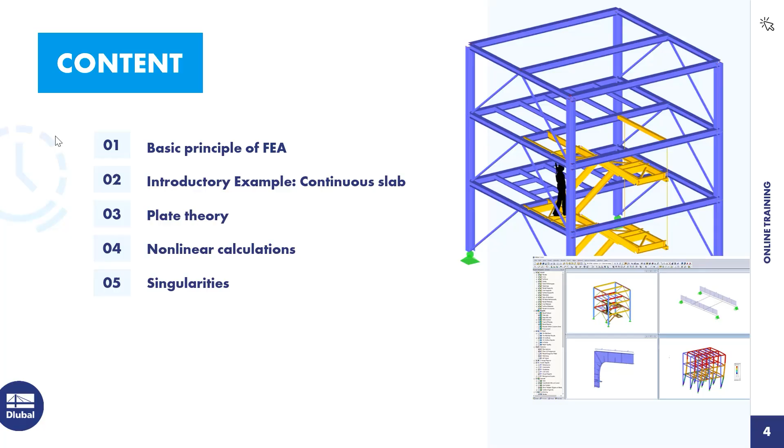Okay, so let's start with our basics of the finite element analysis. As you may know from previous statics lessons in your studies, there are two methods to calculate overdetermined systems: one is the displacement method, and the other is the force method. The force method is called that since the forces are the unknowns in this solving process. Within the displacement method, we have the displacements as the unknowns. The displacement method is more important for us since it is implemented within RFEM, and most computer programs will use the displacement method.

In general, the finite element analysis is used when an analytical solution of the structure is hardly possible. That means we can't just create a function for, let's say, an 8-story building, which gives us the exact solution for every force we have there.

Instead, we will take the help of finite elements, and that's what we do with the finite element analysis. We take the real structure and we cut it down, or decompose it, into a mesh of finite interconnected elements—a specified amount of elements in the system that are connected to each other. We'll see it in the next slide as well, there's some graphics for better understanding. Then what we also need is to define the properties of the element continuum.

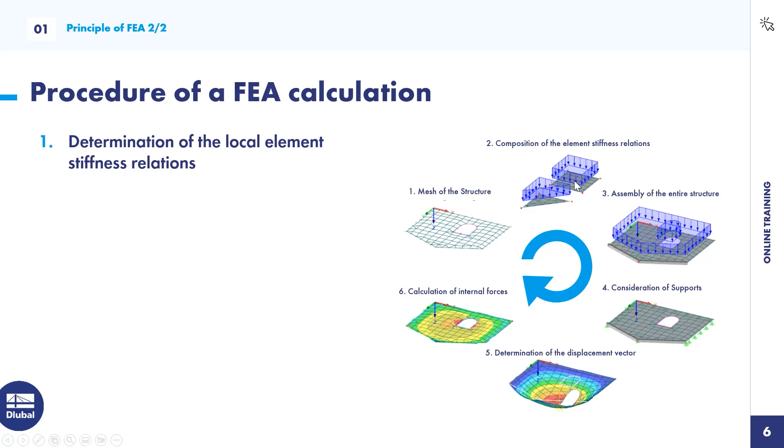For these finite elements, we can define the stiffness matrix, the element stiffness matrix, as well as the element load vector. So we have the system, if we only inspect one finite element, already known. In the next step, we will combine all of those elements, and therefore combine the element stiffness matrices and the element load vectors into the global stiffness matrix as well as the global load vector.

Now for the understanding, there's this static equation called K times U equals F, which means the stiffness matrix times the deformation vector is the force vector. Due to assembling them into the global matrix and vector, we have this K as well as this F. But what's not known is U, the displacement vector. And that's what we want to get to.

So let's go. Now we have the total stiffness matrix K. In the next step, we will use our support conditions, we can see it there, and use it within the displacement vector.

For example, for this edge of the slab, we have a line support, and this line support is fixed in Z direction, which means the line can't move in Z direction. That means each entry within this displacement vector which includes the location of this line hinge must be 0. So we will build this into our equation system.

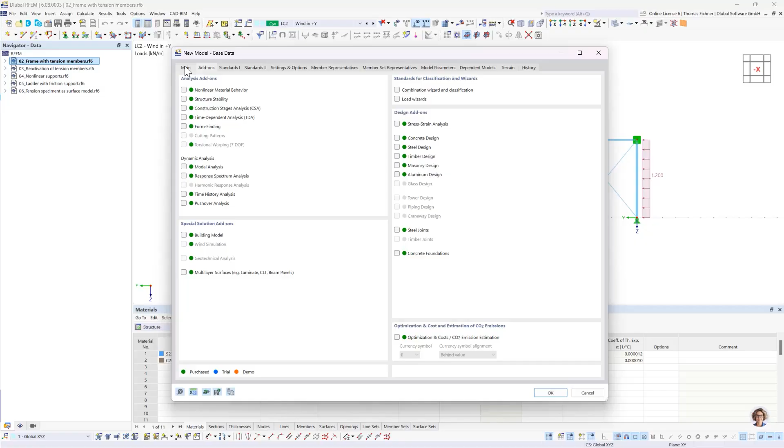Okay, and that's it, so we can press OK and find our empty model in the next step. There it is. So let's go with the view into the Z direction. We can go with our view cube or with those buttons here on top. That's pretty great, and there we are.

So since we're gonna model together, let's say to start from scratch, I will also delete all of my previous elements here. It means you just delete all basic objects, so there's no material defined anymore, no section, and no thickness.

Now let's go with creating our first surface. Therefore, we could go here and just double click like the surfaces, or right click and create new surface. What's also possible, and I mainly use this button since it's just the fast bar here on top, I will click on this button and then we can choose the rectangle. If we used it the last time we created a surface, we will just click it and have the dialog opened.

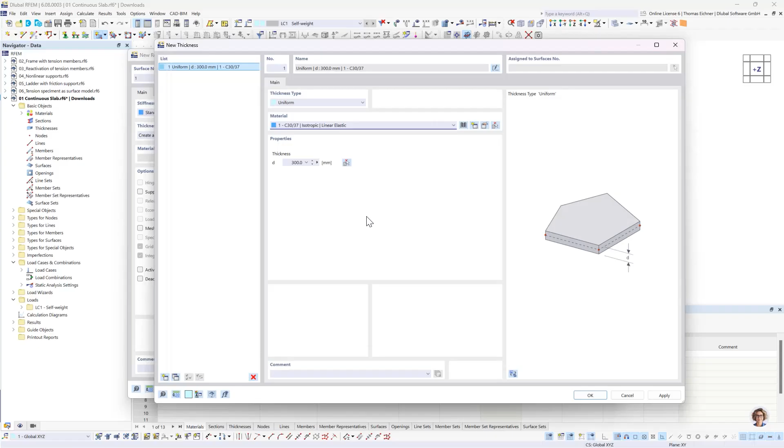So we're gonna take this one, press OK, and there it is. With another press on OK, we will have our material assigned, and then with another press on OK, we will have our thickness as well as the material assigned to this surface creation. And that's what we're gonna do next—we're gonna press OK to get back to our graphic interface.

There we are. And then we will create a 10 times 5 meter surface. Yeah, why not like this? And there it is—so we have our slab right here.

We can also look at it in 3D. We can use our display model settings for showing them, let's say, transparent or filled. This view is always good for, let's say, bigger structures when there are more surfaces under each other or they're overlapping kind of and stuff, so we can pick them better with this dotted or lined line here.

Per double click on it, we can adjust it, but that's not needed right now. Also, we can see our base elements, so our material, our thickness, as well as our surface right here in the data navigator.

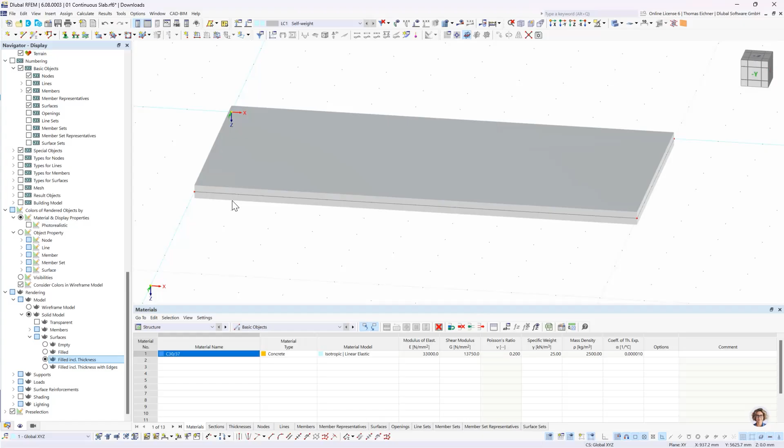In addition, there's this button here where we can influence our rendering. If we go to the rendering on this model, we see the solid model options, and further in the surfaces, we could also show them with thickness. That's just if you want to have more of an architectural view, and you could activate this.

However, since it's a static program and we will use it for statics, this kind of 3D element - because like a real plate has a height as well, but in our finite element analysis, we will treat this as a 2D element. So it will have just 2 dimensions.

Okay, let's leave this here, that's not needed anymore. So what we did now is we just created one plate. And this plate would just fall down right now. So what we need next would be our boundary conditions.

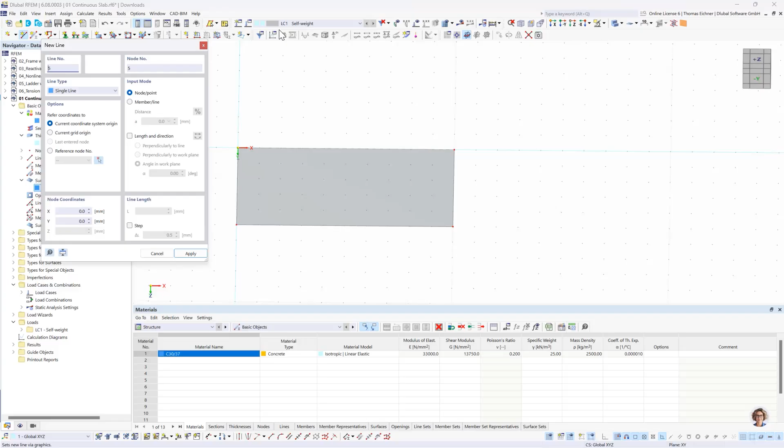And for those boundary conditions, we will also need a line in the middle of the surface. So that's what we're going to do. We're going to take this create line function, and go in the middle on the top as well as in the middle of the bottom. There it is, our lines are set. We can also show it in our other display mode so we can see the line better.

Now we want to apply our support conditions to those lines. That's completely simple - we're just going to take our quick button here on top. Or we could also go for our types of lines, for line support, and then assign them. However, since this is the most used tool here on top and it's quite fast, we're going to go for this procedure. Let's take it, and let's also look at this suggested hinged line support.

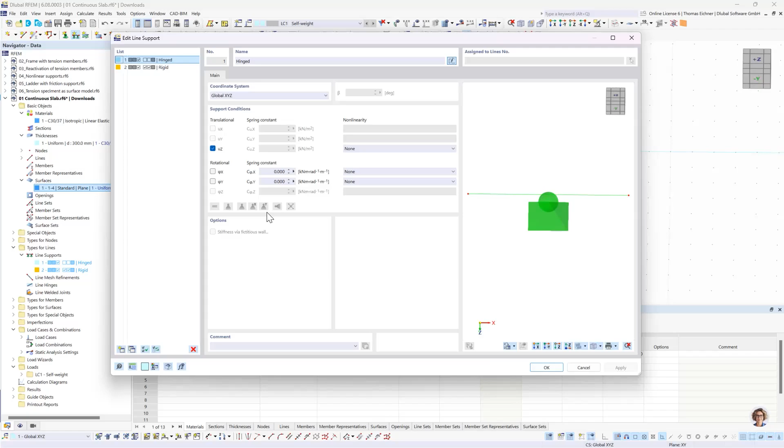And now we will see the benefit of our early decision to model it in the plate dimension and not in the 3D domain. That's quite simple - the program now helps us since we are in 2D plate, we don't need the deformations in the horizontal directions anymore, and we don't need the rotation about the z-axis, which also would be kind of deformation in horizontal direction. So with this, we only really want to hold the z direction on these lines, and that's already set within this preset hinge.

Let's go for it, here again, and then we will apply those supports to our lines.

There they are. We can also apply the loading next, which will be just a uniform load, a uniform surface load of 10 kilonewton per square meter. And with that done, we can just assign it to our surface here. Okay, and there it is.

So our loading is done, our supports are done, our system is already ready for calculation. Just another hint - we can also adjust the size of supports as well as of the loading if we want to have it changed.

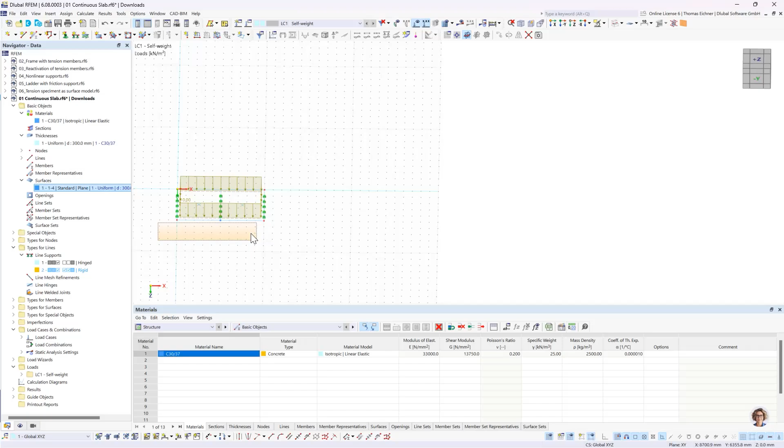Then maybe let's just create our further plates for the investigation. Maybe you saw it already on the PowerPoint file - we will need 4 plates to investigate, which means we will go again and select everything within our current system.

We will then right-click it and take the benefit of our move and copy function. Let's click here, and let's also check this create copy button, which is really important. The next step, we're going to copy it 3 times. We have a length of 10 meters, then I want to have a space of 5 meters, and then there should be the next system. So we will need 15 meters.

Now I just see from a previous model I had open, I'm still stuck with millimeters here, the dimension of millimeters. I want to work with meters in the current model, so we can go for these units here on the bottom. We can click on it, and then this red arrow will help us see what units are used in the current dialog. And we see we have here lengths in millimeters, and we're going to just change it to meters.

Gonna prove it here and set our displacement for the X direction to 15 meters. When it's done, we can confirm it, and there our new models are.

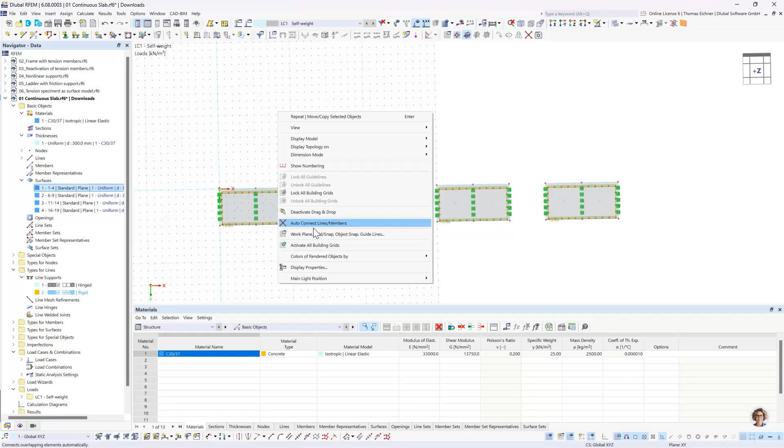Now what we see is that our grid is not over the whole system anymore. So we want to adjust also our grid here, and that can be done with a right click just anywhere on the screen, then click on the work plane and grid options.

Within here now, we can say okay, we have right now 30 dots from here. That's not enough. What we want to have now is, I'm just gonna put a lot of points here. Let's pick 200. Later on I will show you also this dynamically number of grid points.

But we will also want a different spacing between those dots. Currently they are set to 1 meter. The problem with this 1 meter now would be that we won't have dots in the middle of the plate, right? Since it is 5 meters, the middle would be at 2.5 meters. That means I will adjust it and make our grid a bit more fine. Let's set it to 0.5 meter and apply it. There it is. Now we have our grid.

Yeah, and it's quite better. Okay, so we have that.

We can also look at our plates in 3D for a second. Let's go like this. Looks okay for this short duration of time. We just created 4 cool systems.

At least simple systems. Okay, so in the next step, we will go for the Z view again, and as I previously mentioned, we want to investigate the size of those finite elements. Another hint: if you double click your middle mouse button from anywhere here, you will get back to the system and the screen is just adjusted to have all of your system within this window.

Since we want to investigate the size of the finite element mesh, we will also want to have those slabs with different finite elements. But at first, what is used if we don't define it for each surface? Without any assignment, we will have just our base settings here.

This means we can look at them with this calculate button on top, and here we can find our mesh options and everything regarding the mesh. If we go for mesh settings right now, we will see that currently we have a length of the finite elements of 0.5 meters, which means these edges of those finite elements, the program tries to reach 0.5 meters with them. If it's not possible, then he will vary it and could also add triangular elements.

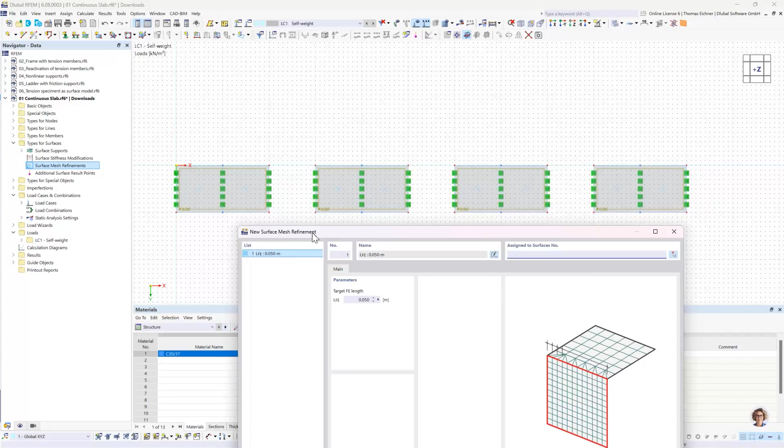Right here, we can now just create our surface refinements. The first one will be quite coarse. We will go for 2 meters and assign it to our first surface here. We will apply it and create our next mesh refinement here.

This will be only half the size—well, the edges will be only half the size—and we will apply it to surface number 2. Maybe you can see already, we created surface number 1, then surface number 2. So we can be smart and think about this as surface number 3 and this as surface number 4.

Okay, so for the first two, we clicked this and selected it in the graphics. For the next two, we will go with our faster way: we'll just enter surface 3 right here. Then we will go for the fourth one, and this one will be quite fine, and it will be assigned to our surface number 4. We will also see on which surface each mesh refinement is applied to, here in the brackets.

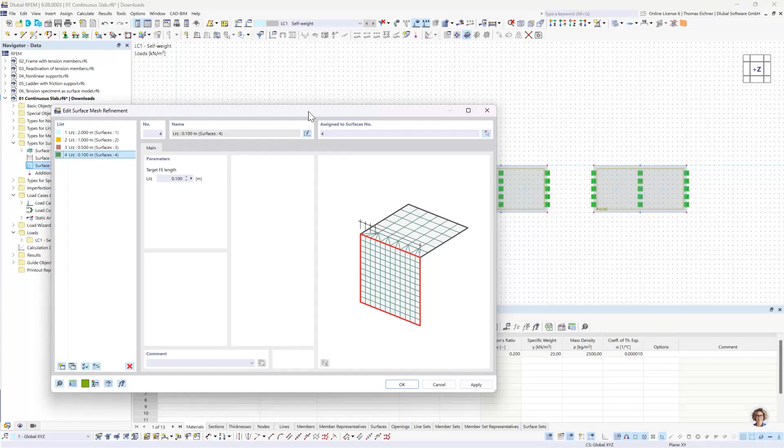Before I press OK, I just want to have this here, so you will see what happens right here. Let's press OK. And there it is. We now have a new rectangle within our surface.

And those rectangles, we can see it also for every surface, maybe like this. Shows us what the desired length, or desired size, of these finite elements will be. Here our quite coarse 2 meters length, and here, well, we would have to zoom in to even see how big this element is. So that's really fine.

Okay, so now we have the system created. Now we can go on and create a little helper for our interpretation of the results. Since surface results are not the best to interpret within the surface overall, we could also create a section through all of those continuous slabs, and then we can evaluate the results just within this section. That's what we're gonna do.

Now the section is not a property of any basic object, it's not only like the section can cut a solid as well as it could cut a surface, so it's not a property of a surface, for example. And for that case, we have something called special objects.

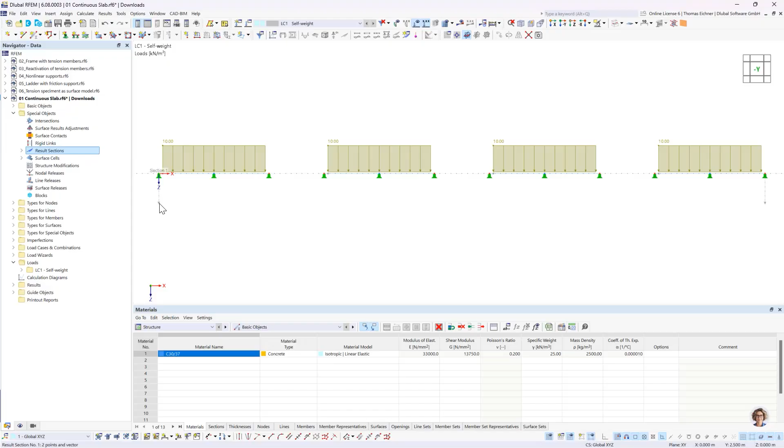Let's press OK, and let's turn the model for a second. And here we see it. Oh, maybe it's better to just use this -Y. And there we see the section right here. Okay.

So our surfaces are ready to go. Let's maybe show our refinement of those surfaces again. And for the comparison, we said we also want to look into the results of a just simple constructed beam.

That's what we're going to do next. We're going to create here this new member. And within this member, we will have to apply a section since we don't have any. It's like the same procedure as with the thickness before.

Let's go for it. Gladly, our right material is already selected here. And we will have to adjust just the section dimensions. So, what do we take here? For the height, it's quite obvious, we will take the same height as for the slabs.

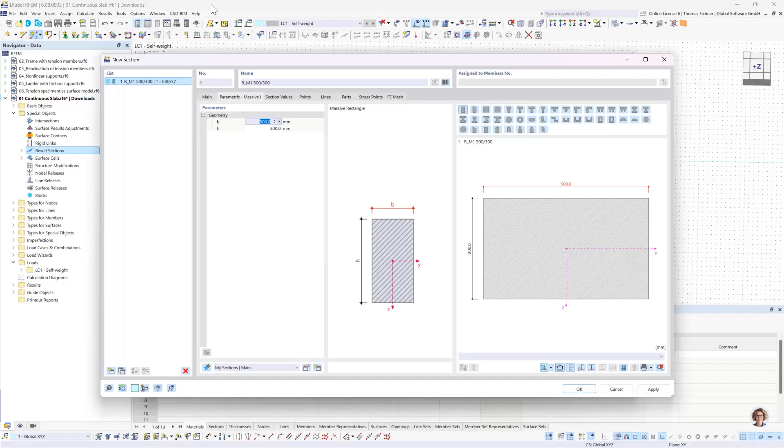But now let's look at the other dimension of this section. We have 5 meters in the width of the plate. However, we now don't need a 5 meter section here. What we do need is a 1 meter, so 1000 millimeter section right here.

And the reason for this is the results of surfaces are displayed per meter. And the results of members and beams are just shown in pure kilonewton. It's not kilonewton per meter, it's just kilonewton. So if we would have 2 meters here, it would still be just kilonewton.

So to have this per meter within the results of this member, we will just pick a 1 meter section here. Press OK here and also press OK here. Will get us back to the graphic user interface, and we will be able to create our 10 meter long member.

This is done now. Now I see I have here some member representatives. They wouldn't be needed. Let's see if we can just deactivate them. I mean, it doesn't change anything, it's just some help, but I don't want to have this dot right here.

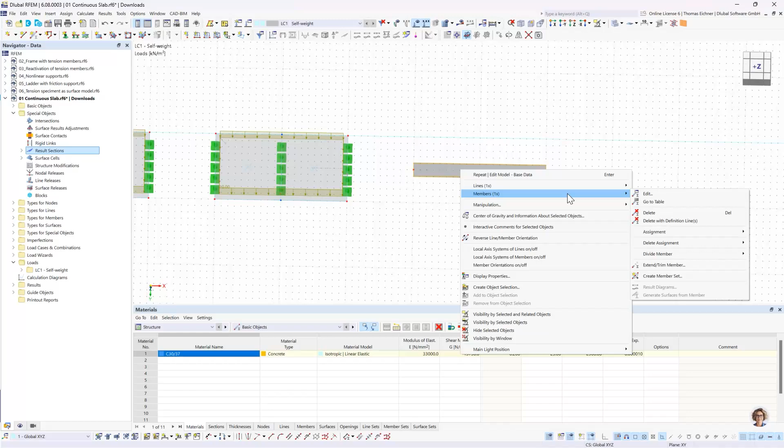Okay, now we want to have supports again, but we are missing this one node in the middle. So what we're gonna do is right click on the member, go for this member, and divide it with n intermediate nodes.

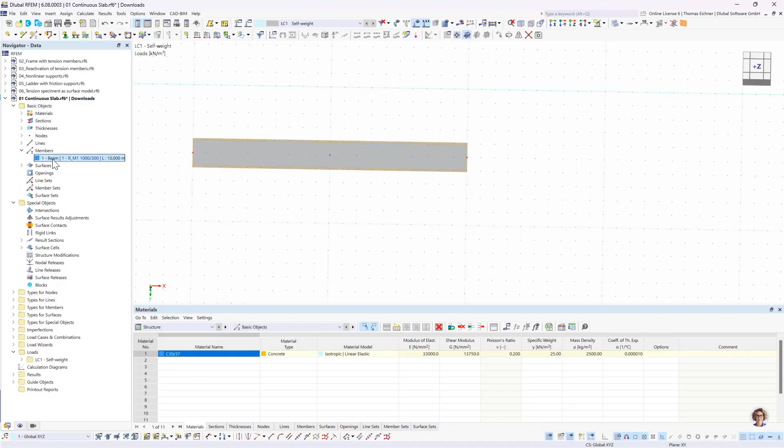There, just one is enough, and we can create the division. If we press OK, this member would be split into 2 members still connected in the middle, but we can also use our member nodes so this member won't be divided. As a hint, it wouldn't make any difference for the results. The only difference is we still have 1 member, and if we go for the basic objects, here still only 1 member, and you can have fewer objects within your model with this.

If we hover over this node, we can see that it's defined with 50% of this member length, which also means if we now change this member in length, the place of this middle node will change. So we don't need it.

So let's go back to this 10 meter beam and now apply our support conditions. For this plate, we only fixed the Z direction. Now for the member, if we think about it, if we only fixed the Z direction of this member, that seems okay in the first step. But the problem is it could rotate around its own axis. This is not possible with this line support for the surface, since it's supported here and here, so no rotation is possible.

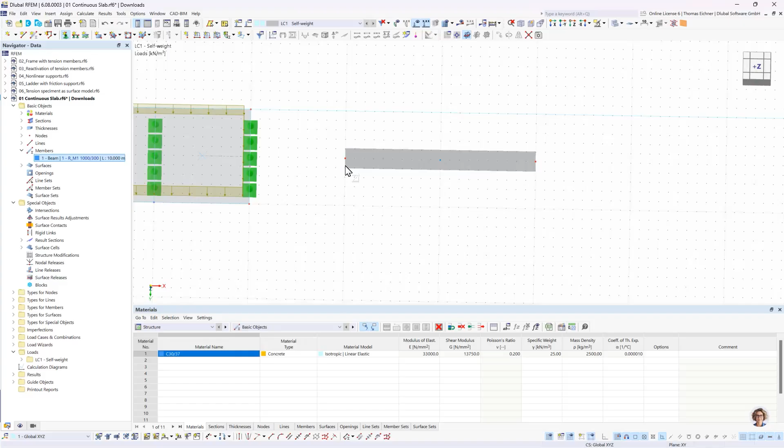But with this point nodal support, we don't have this interaction. So we need to also restrain this rotational degree of freedom. We will go for this nodal support, and we will look at our predefined hinged one, and there it is. And now there's the point I just said - we will also have to restrain the rotational degree of freedom here. We would only need to restrain the rotational degree of freedom on one node, and we wouldn't need it on the other two, but for simplicity I will just apply it to all three nodes, since for the results it doesn't really matter in this case.

Okay, so there's one more thing, and that's that we need to load the member in the same way as we loaded the surfaces. That means we will take our member load here on top, and just apply 10 kilonewton per meter to our member. When it's done, we have it right here.

Okay, now our system is completed, but I just remembered I also want to have something different in the material. So now we want to change the material. There are different ways to go about it. We could double click into our surface and go for the material and so on, but that would need a few more clicks. The simpler way would go like this: we will take the material here, double click it, and we are in all the properties of the material.

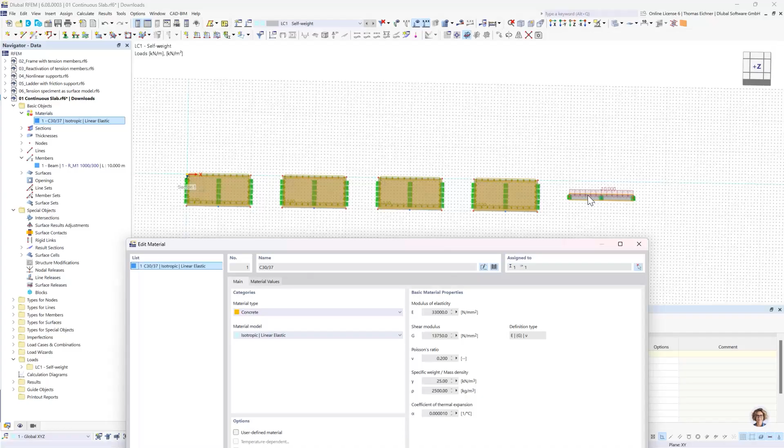And now what I want to change is this Poisson's ratio. That's a value that describes the influence of an internal force that makes pressure in one direction - this Poisson's ratio gives you information about how this internal action in this direction would influence the perpendicular direction. Since we are comparing everything here with each other, we don't really want to have this impact. So we want to set this to 0, and that's only possible if we first activate this small user-defined material button. With this active, we can just change it to 0, and then we are good to go.

Let's see our self-weight load case here on top. Within this, we only have this one - we have our 10 kilonewton per square meter load in it. But here's also, that's just predefined by the program - it always creates a first load case with only the self-weight active. For this special case, we don't need it. It's simpler to just have a 10 kilonewton per square meter load for interpretation. So we will just deselect this option.

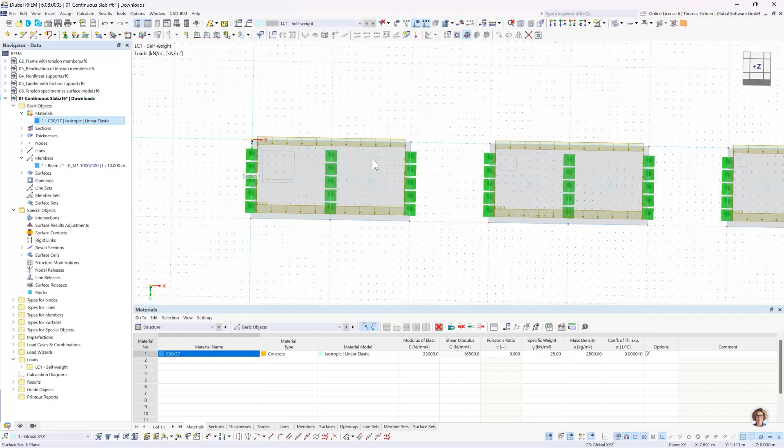Okay, and yeah, right now we're done. So maybe to repeat a bit of theory from earlier: we have our plate, which defines our stiffness matrix. We have our loading, which defines our load vector. We have our supports, which have influence on our deformation vector. And with that, we have our equation, K times U is equal to F, ready for its solving process. And that's what we're gonna do now - we're gonna go here and calculate this equation. Let's see what's gonna happen.

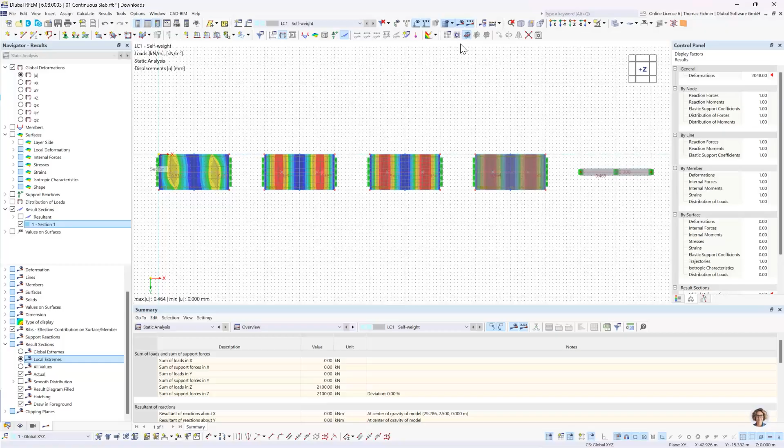Okay, let's see why those results are like this right here. And therefore, we will go for the Z view again. And also we will not show the results for this investigation. Now we see our constructed mesh, and we see this completely fine mesh. We will ignore it and just look at the difference between those three models.

So in the first model with our 2 meters length here, well, that's quite coarse. And we also see we even have here a triangular element, which is also always not perfect, since it's better to have a uniformly distributed rectangular finite element mesh. Sometimes it's not possible to avoid those triangular shapes, but if possible, you should try to avoid them. So right here we have 3 elements.

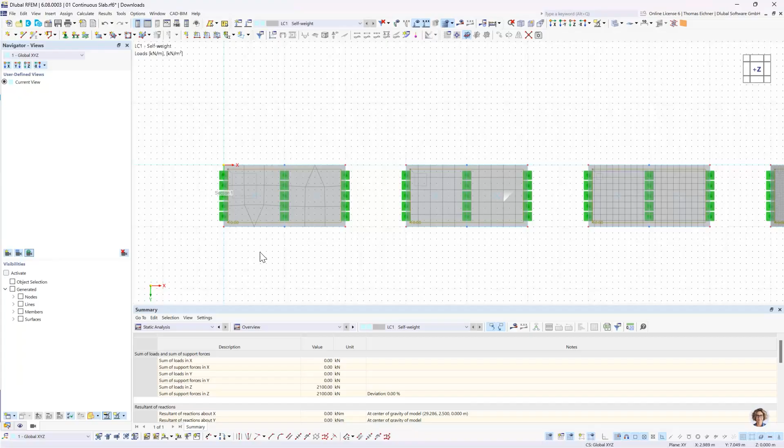Now when we look at it, we could also imagine a single span beam here. Then we know our maximum moment would be in the middle. But with this element in the middle, we wouldn't have any result in the middle. That means we wouldn't even have the possibility to show the maximum here, because the next value which would be shown would be this here at the edge of this element. So that's just not good.

And that's the point here in the next figure. We can see 5 elements here. I learned some rules in my studies, and the rules were like 6 elements between supports for a single span beam should be good. You should use 6 elements between 2 supports, or also if you have a line load or a support load, you should also have 6 elements between this line load and the next support or line load.

Like everything, there's a change in the boundary conditions or the force, there should be around about 6 elements to the next change. For design, if you're just interested in looking at the forces that will get to your supports, then it could also be that just 4 elements are enough. But if you want to remember something for the future, I would go for 6 elements.

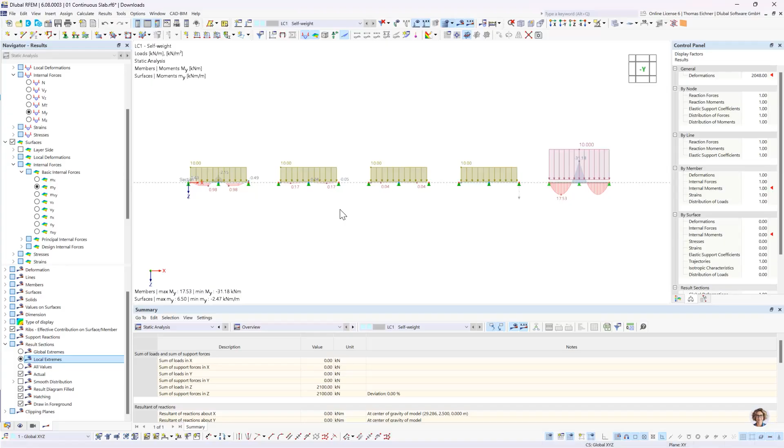Now for the explanation, we have different internal forces conventions here. So for the MY, it's quite simple. Our y-axis points outwards. This means with the right hand rule, we will know our positive MY would be like this, pointing upwards. It's rotating around the y-axis. That's why it's called MY for beams.

But now it's different for the surfaces. Before I'm gonna explain it, we will change to the right one. We will go for this MX. Now we see, okay, now we have comparable results.

But why is that? Now for surfaces, this is differently defined. So it's called MX since we have the surface. We will go in X direction, and there's like a plane that's cutting through the surface now. And it's cutting in X direction, so perpendicular to the X direction. And then we rotate about this edge here, this free cut edge. And that's why, since the cut was done in the X direction, it's called MX. That means the MY would be exactly in the other direction.

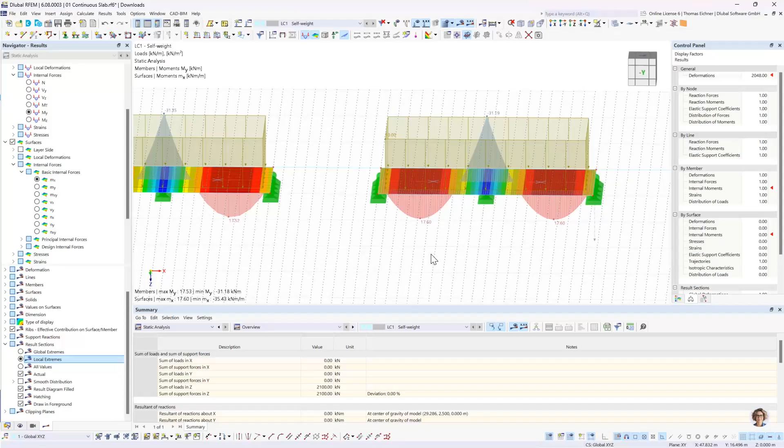So let's go again for the Y perspective. We can also see here the results are quite similar. And let's not show the forces anymore. 31.18, 31.19. That's almost the same, but there will be some differences.

And for this time, we will go for this section here. Now we select this section with a right click, and then this result diagrams. We will jump right here. There it is. And here we can just see the results for the different cases. It's just the same as we saw in the model, just that they will be next to each other and could be better prepared for a printout report, for example.

Okay, don't need this preset. We're only gonna look at our results right here. And there we have it, 31 point something versus 28.45. That's some difference. That's like, in this case, I guess 10%.

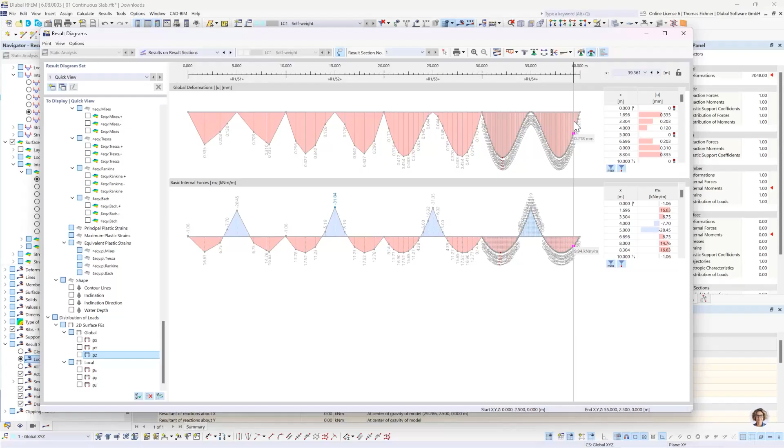And this 10% also holds for the middle of the span here. And this 10%, those are not enough. I would say this result is just not precise enough. So here this 28.45 versus the 31.18, yeah, almost 10%. That's not quite good. So that's the problem with this coarse mesh. We will lose exactness in the results.

On the other hand, let's look at this extremely fine mesh. And let's also show again all values. Within the left system, we will see we only have 1, 2, 3, 4, 5, 6 elements here. So our global stiffness matrix is constructed out of the element matrices of 6 elements. We're just ignoring this dimension right now, let's say we only investigate this direction here. So 6 elements.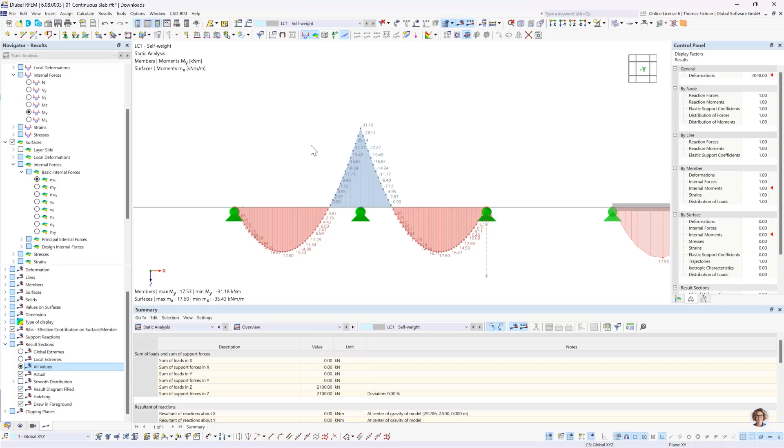So this can be quite fast solved. It could also be almost calculated by hand, not fast, but it could be. But on the other hand, if you look at this one, it looks more like 100 elements, and this means also 100 kind of degrees of freedom here between each element. That means the solver and the calculation system is way bigger than in this first case. For this simple structure, it doesn't really make any difference since it's fast anyway.

But if you think about like a 20-story building and you would go for a mesh which is this fine, or if you think about my dynamics field where we not only have the spatial dimension but also the time dimension, and we're gonna calculate these equations once each 0.01 seconds, we will increase our calculation time by quite a lot. So there's this one sentence, and that means for these finite element sizes, it should be as fine as necessary and as coarse as possible.

Okay, so I would say we're already done with this part right here. And now we can go on for our next short theory. Back for our PowerPoint. There it is.

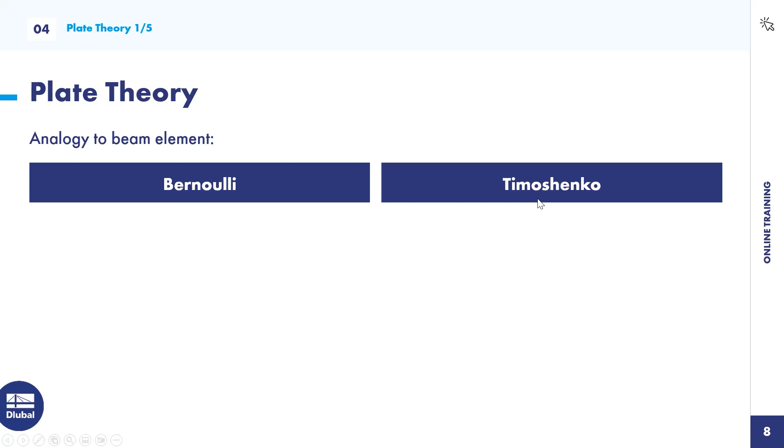And the next part will be the plate theory. So for members, you might know there are two concepts or two theories. The plate theories are almost the same as those for members. So for the beam element, we have the Bernoulli as well as the Timoshenko beam. The differences, well, let's go for the similarities first.

The cross sections remain plane, and that's it. Now the differences: the cross sections for the Bernoulli beam remain perpendicular to the member axis, while for the Timoshenko beam, they won't stay perpendicular. You will see it in a few seconds in the next slide what that means.

For the Bernoulli beam, we just don't care about the shear stiffness, just don't care about the shear deformations, and it's just rigid for shear forces. For the Timoshenko beam, on the other hand, we will have an influence of the shear deformations. That means we won't only have this bending deformation, but we will also have an amount of shear deformation that's just added.

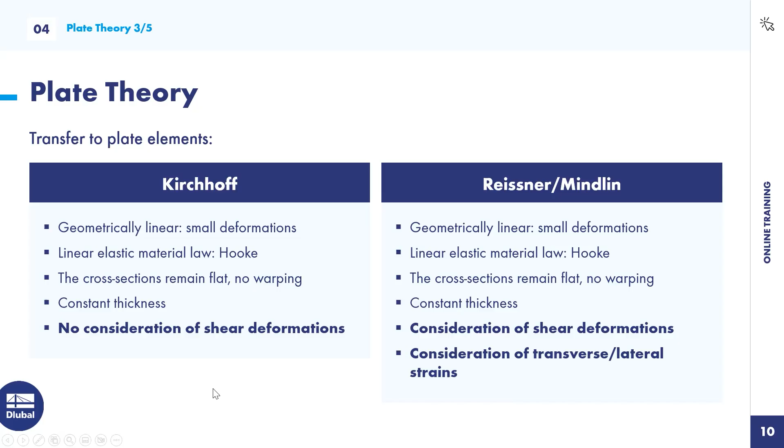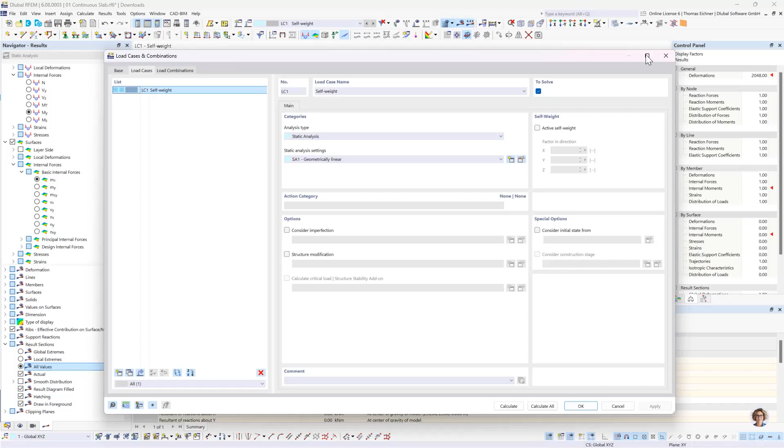For that, it really helps to use our handbook, or for example, this Reissner-Mindlin and stuff. You also have this short helper here with our Mia, our AI assistant. It's also on the homepage, and you can just write your question to her and she will send you an FAQ or the direct link to the place in the handbook and so on. And then you just get a GUI screenshot where you can find it. So that's, I know time is rare, so this will help you be faster.

Okay, then let's go back to the PowerPoint, but I think we're done there already. Exactly, so we're done here already, and that means we can jump back into RFEM. And for the next few models, you won't have to model along. I prepared some models already, so this is something you can just watch right now. And yeah, exactly, so we have right here a frame with tension members.

What does it mean? That means we have nonlinearities. Just for one thing here, since we're treating nonlinearities, let's also define what a nonlinear calculation changes within RFEM.

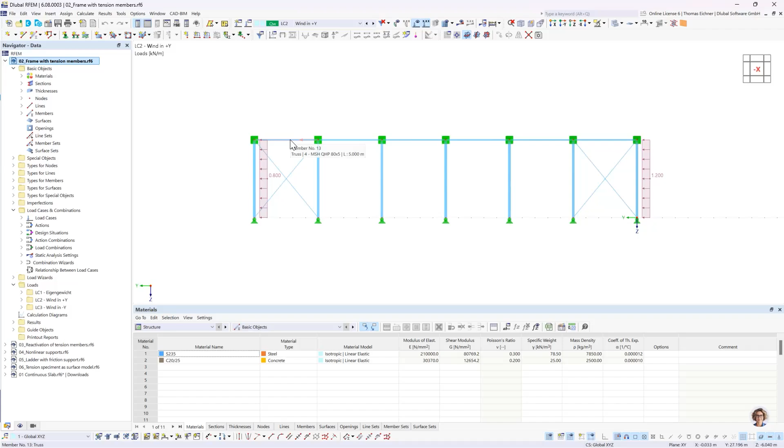Okay, then let's go into one model before our small coffee break. Back to our nonlinearity model. Right now we have our system here, completely made of trusses. We have this frame completely made of truss member types, meaning we have hinges and all the members could rotate about their connections. They would also be free to rotate here on the bottom.

So we have some wind loading in this case in the y direction. And now we want to see what's going to happen if we delete our tensioning here. Let's just calculate it and see what happens. Okay, there's some error. Something seems wrong.

Here the stiffness matrix is singular. That means, mathematically, the structure is unstable, so it would collapse. It also gives us a hint at this node in the y direction. Y is here, so it would just fall down like in this direction. All these members would rotate around their supports, and this would just go boom. Well, that's a problem, so we want to do something against it.

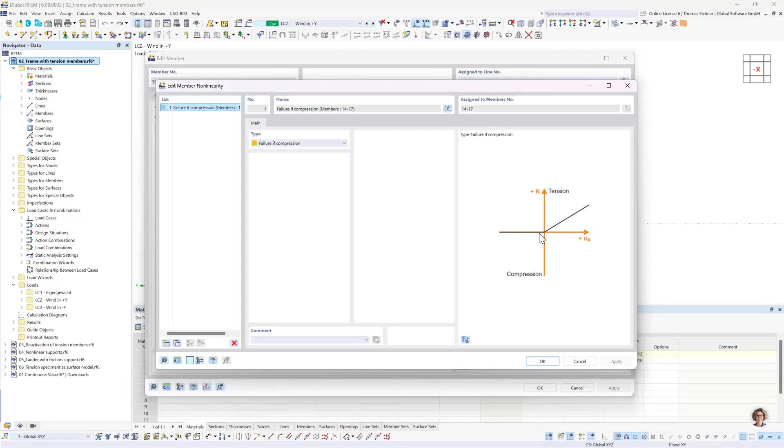Failure if compression is already defined. Go into this member nonlinearity, failure if compression. There we have how the member would react to any forcing. If we get into tension, a positive normal force, then we would have some stiffness in the member. However, as soon as we go into compression, the member completely fails, so it won't take any load anymore. There are also different possibilities. Let's check, for example, the yielding. This would mean it goes to this yielding limit, and then it wouldn't take any more force, but it would still be able to hold the current force level.

Okay, failure if compression, that's okay. One alternative for the truss with this nonlinearity would be to just select this tension member. It's just the same, so we have multiple ways to the right solution here. Let's stay with our truss. Let's press OK and see what the system does with our adjustment.

Okay, and there we see something. Well, it's not unstable anymore. That's great. We see this horizontal force mainly travels directly into the support. We could also look at the support forces—mainly it goes directly into the support. I would say 3.6 will go directly into the support with this member, and the other 3.6 will be traveled through the beam here on top. And then we have this tension member, which will redirect most of the force back to the support.

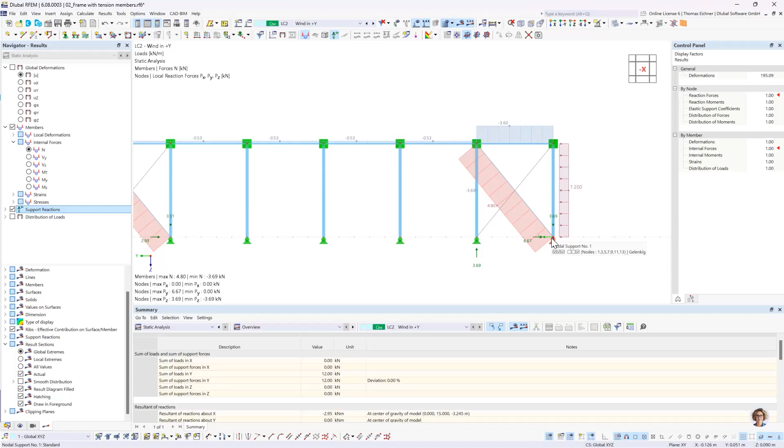And what's with the other member here? Well, if we think about it, and look at our deformations as well, let's do it like this. Then we see this member, compared to its original placement, shortens. And if it shortens, that means it would have a pressure force. But we told the member to not be able to take pressure forces. That means it fails. And if you look closely, you will also see that the color changed—we have the blue tension here, and this one is gray now.

And if a member is displayed gray in the results, that means it failed. The same on the other side, just with a bit different values—this one takes the tension, and this member will fail. Okay, and that's it for this model.

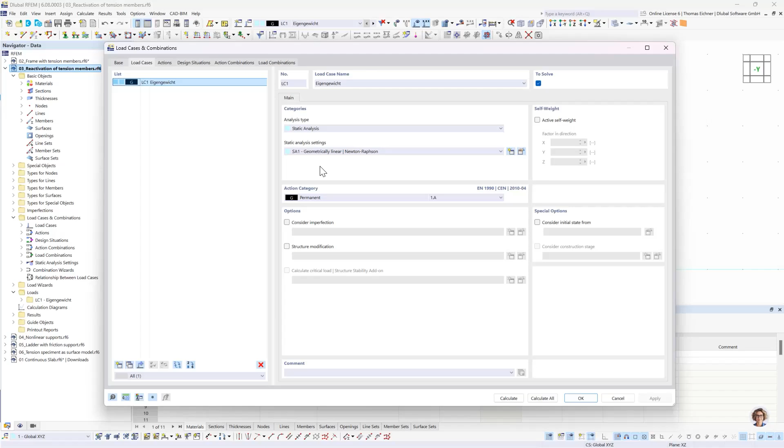Let's just calculate the model with this first order theory. And let's see, it's working. And now we see what happens here. The system is just gonna deform in vertical direction. That means these tension cables would shorten, and that means they would need to take pressure. That means they are gray now, since they both failed.

Now, what we want to do is a second order theory analysis. That means the program automatically adjusts a very small deformation in one direction and will investigate how the loading will impact, how this, let's say, imperfection will impact the analysis.

So for it, we will go here and just change to our second order analysis. We will press OK, and also calculate the model again. And here we will see a problem. The problem says we have an unstable model again, and this time it's in the X direction, so this model would just fall over. Why is that?

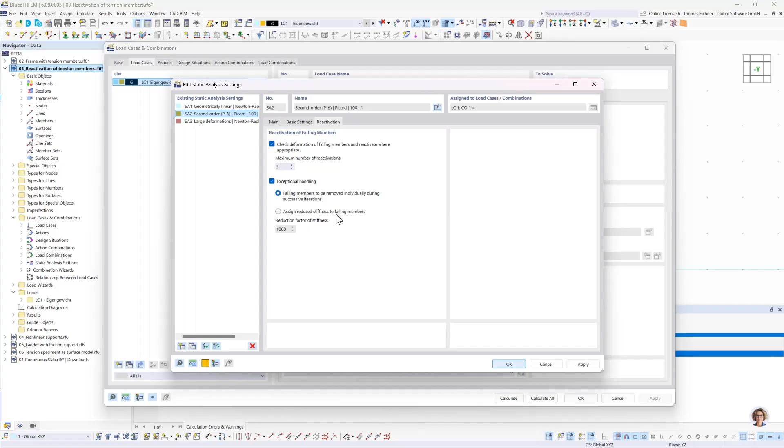So with this active, and with a new calculation, we will now have a stable system again. Here we can see, and that's exactly what I mentioned before, the system deformed a bit, also in horizontal direction, because of the second order theory. And this member now takes tension forces. Well, they are incredibly low right now, since the second order effects are comparably low due to the only vertical loading, but this setting helps to reactivate this member again.

So if you get into problems with instabilities and nonlinearities, then one setting option would be here within those reactivations.

Okay, that's it already for this system. Let's just jump into nonlinear supports. So right here we have, let's call it a cantilever. Without the support it would be... we have a cantilever, and it's forced with a single point load of 15 kilonewtons here on top. And we have a support that holds it right here. So for the comparison model, we added a nonlinearity to this support. Let's look at that nonlinearity.

Here it is. We can see in the x direction, shown right here, that we have a failing support now if the reaction is negative. Let's see, just one more hint: our support reactions are always shown as external forces. We would have a force that comes to that support, and the support reaction is in the opposite direction. Just as a hint, now let's look at the results.

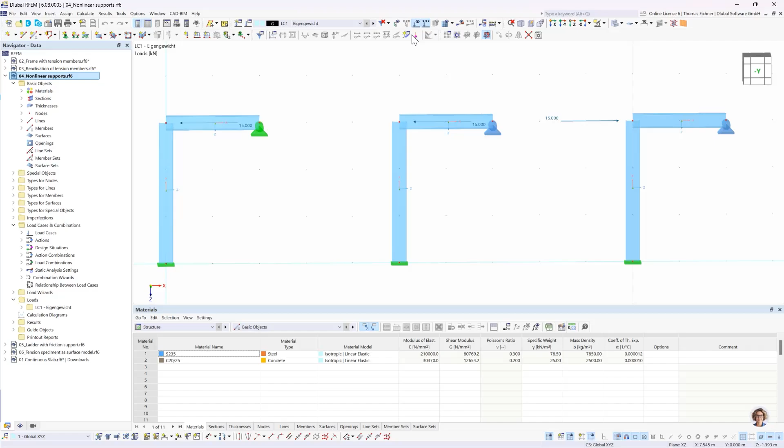And here it is. So we can see for the first system, where we have this 15 kilonewton here, most of the force is directly taken by this support, right? We have this, let's maybe just go for another visualization. We can adjust our deformations right here and go for only lines.

This way we can see this 14.88 support reaction. The support direction looks in the positive x direction, but as I mentioned, this is visualized as an external force, and the force that really comes to that support would point in negative x direction, like the force we applied here. You see this 15 kilonewton? It's directed in negative x direction. So there will be a force to that support in negative x direction, and for that support to have zero deformation, it needs a reaction force in the other direction. That's why this reaction force is defined as positive.

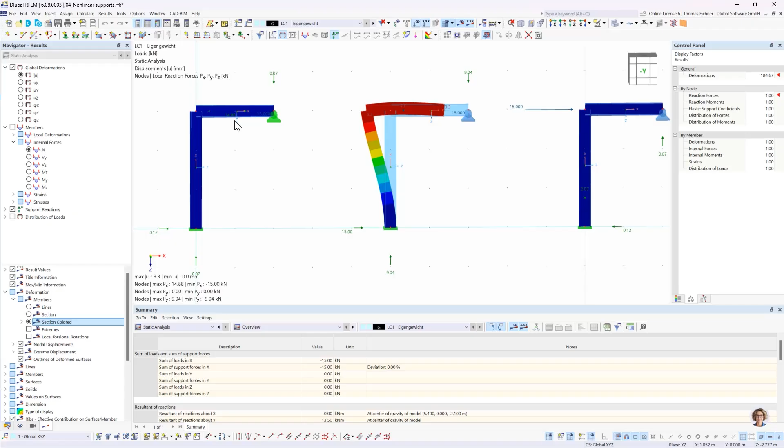But that's important now for our next system. Let's go for the sections again. This time, this support will fail. We defined the failing as when the support gets a negative x force. That's what I meant, because now this would be interpreted as this 14 support force from the left system could be interpreted as a positive support force, and it's true. But for this nonlinearity, it's important what force is coming to that support, right?

Okay, and maybe just for the last thing, I also changed the direction of the force, and if we change the direction, then the support is active again. You can see it here. We have forces again, and it's active again.

Okay, so now we get to two more interesting examples. Let's go on the first one, and that's a practical example.

What we see here is just a simple ladder. This ladder just leans on the building, so it's only supported in x direction. So it leans to the building and it's only supported in x direction. On the bottom, it stands on the ground, so it is supported in z direction. We could also implement a failure if negative, but that's not needed right now since we only have vertical forces from the top to the bottom, so it's gonna hold anyway.

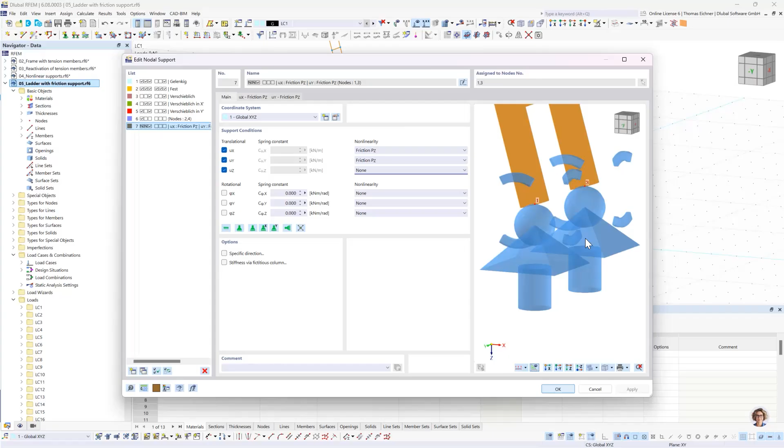Okay, so for the other two directions of the supports, we defined a friction. Let's look at it in the x direction. We have this friction coefficient of 0.2. That means the support can hold 20% in horizontal direction of the support force in vertical direction. So if we have 1 kilonewton in vertical direction, it will be able to hold 0.2 kilonewton in horizontal direction. And if the horizontal force gets higher, then it's just like yielding.

Okay, with that said, let's go for our loading. We can see it here. Now we have a person of 100 kilograms, and this person is gonna walk upwards on this ladder. Let's see what happens, we are just gonna calculate all, right? Maybe you could also think in the meantime, what happens with the horizontal force needed here if the person goes up.

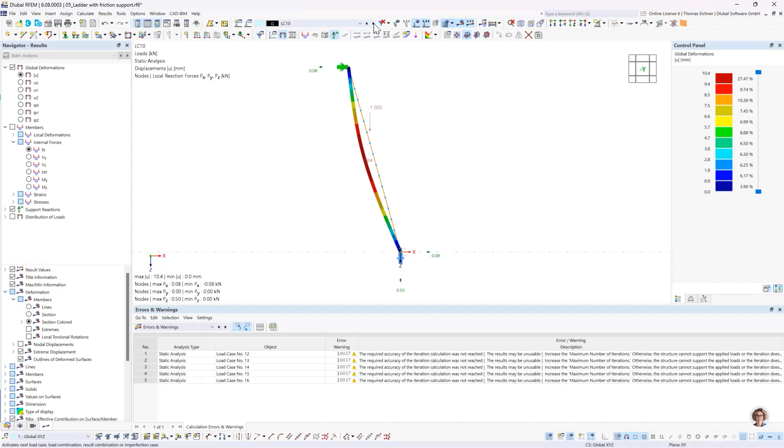Now we will look at this, and we're interested in what's gonna happen with the load case. 8, 9, 10, 11, and here it happens. We can see a deformation of 10.4 millimeters now. Also, we have our warnings here. We can't find a result anymore.

So the problem here is obviously that with the person on top, the ladder would just slip away. And that's not good, right?

So there are different measures to counteract this, to make it possible for the person to climb higher. One would be someone just holds it, and we have two hands as horizontal supports, but that's not the case we're interested in. What we're interested in right now is to have another person just standing on the lowest spross here. And that's what we're gonna simulate right now.

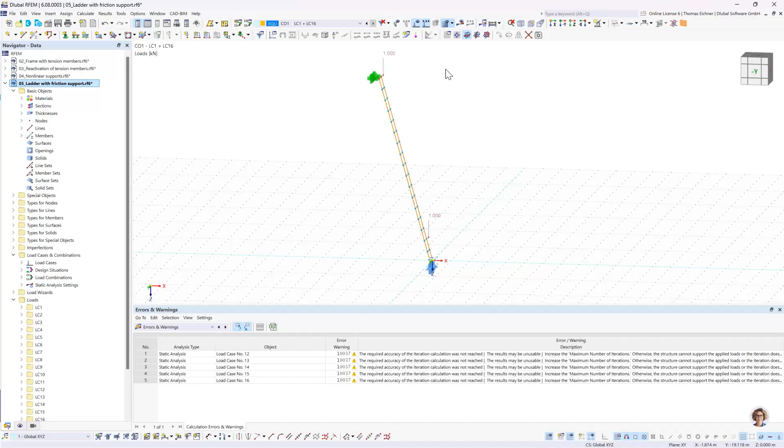We're gonna go for a load combination now. With this load combination, we will go for one man or one woman on the highest spross and one on the lowest spross. Okay, we applied it. We also see what we're gonna simulate right now, and we can directly go into our results.

So, and now it seems possible. And it's quite easy to explain. Just from these support forces, instead of having this 0.5 kilonewton per support, we now have 1 kilonewton per support. And that also doubles our capacity for horizontal loads within the supports. That's why we just proved that it helps that someone stands on the lowest spross of the ladder.

Okay, let's finish with our last model for nonlinearities. In this case, we will investigate a tension specimen. Look at it from 3D. It's just modeled as one surface. For this surface, we have a fixed support on one side, and on the other side, we will just pull it.

And we pull it with a specific force. In this case, this would be 503.572 kilonewton per meter on this line. So what is this force right now? What are we trying to investigate?

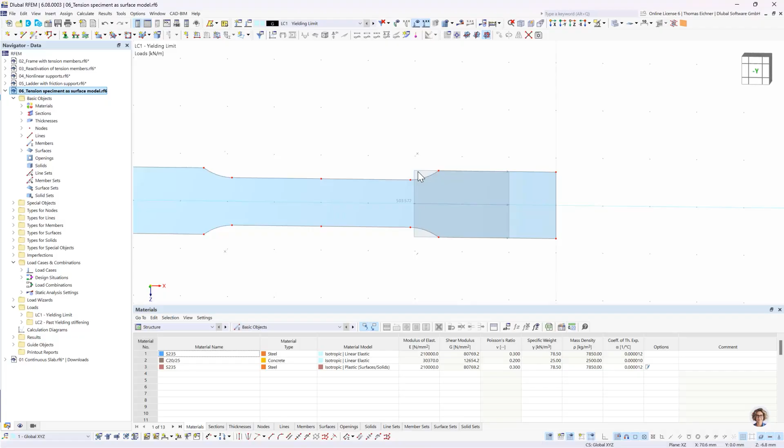And now we did apply a load on the outer line, which is shown right here. What we did here, the height of this line is 14 millimeters. So if we multiply this force times the length of the line, we will get this 7050 Newton. This height here is 10 millimeters. So if we take this force and divide it by the cross-sectional area in this region, we will get to our, what a surprise, yielding limit.

Well, this was completely planned. I just did the calculation the other way around to get to this force. And this way we will simulate what happens if we go into yielding with this tension specimen.

Right now, maybe we will look again into the surface. We have a material which is S235 and it's linear elastic. Okay, so we have a linear behavior of this material.

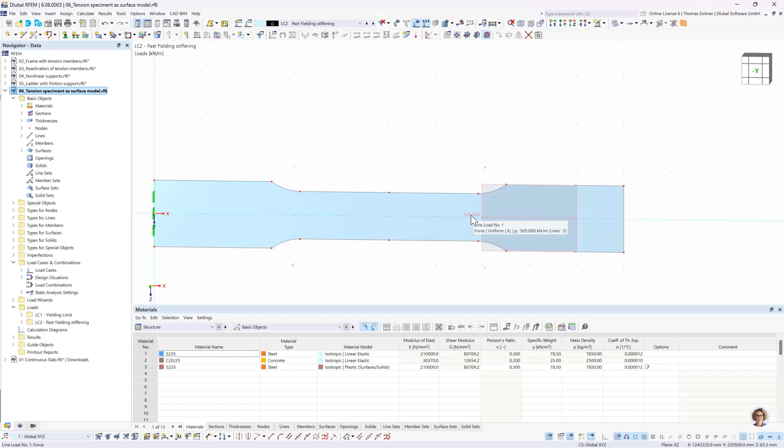Now within this first load case, 503.572, it's gonna be simulated to be at the yielding limit. And for further investigation, we also added a load case, which is here with a 505 load, so just a tiny bit higher, a tiny bit over the yielding stiffness. And that's the two load cases we're gonna investigate now. Let's calculate both.

And exactly, now we can see the results right here. Then we can see a deformation of 0.1 millimeter right here. We can also display it as an animation here. And yeah, quite simple, 0.1 millimeter. That looks fine. Let's look at our post-yielding situation. Well, it looks quite the same, quite identical. Also, again, deformation of just 0.1 millimeter.

So for the stresses, it's a 235 grade steel. That means we can look up our stresses, and there we will go for our equivalent stresses according to Mises. Let's look at them, and now let's adjust also something right here.

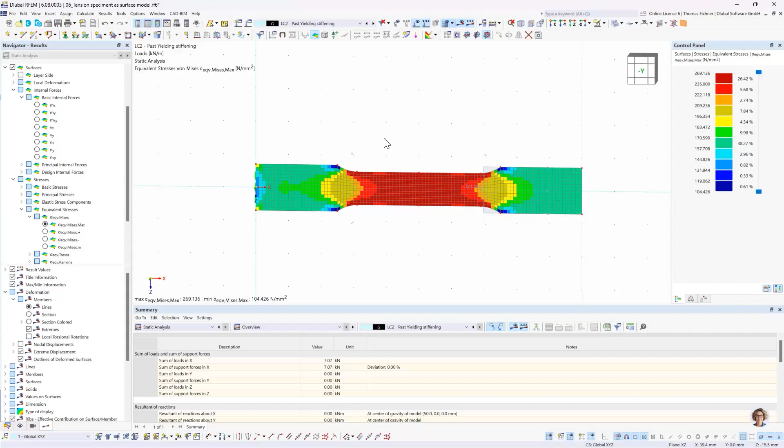One more hint with these results here. What you see is the finite elements, and the elements all have an equal value within the element. This is important when interpreting stresses as results, because you don't want the stresses to change within one element.

That's what we can also show here. If we go for results, and for calculate and results smoothing, there we can adjust how we can see it. Right now we've got this constant on the mesh elements. If we go for continuous within surfaces, then it follows the line to our surfaces. It looks quite smooth, but it's not perfect for result interpretation. So this is cool for visualization, but not the best for interpretation. We will go back and get it into the constant on mesh elements.

Perfect. Now we're gonna do what we wanted to do. We're gonna look at our plastic material. Let's take a glance inside it. Here it is, we have a plastic material. The rest is quite the same as for the linear material, but we have an additional tab here on top. If we click on it, we will be able to define the limits of this plasticity.

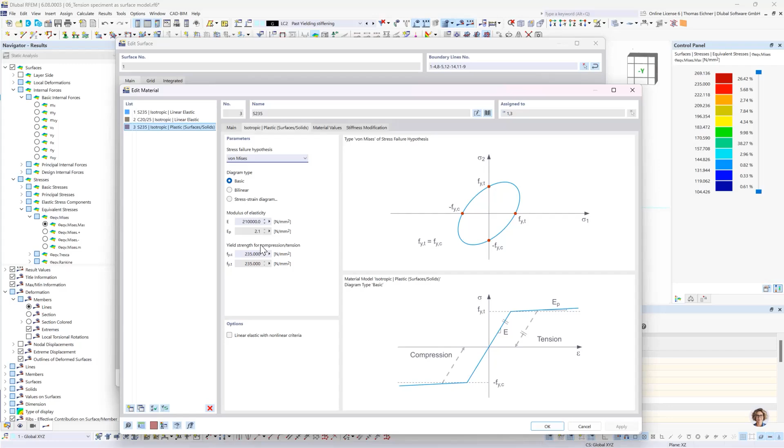Right now for it, we will use the von Mises stresses. That's why I also showed you the equivalent von Mises stresses right here. And for them, we will define the yield strength, which is 235. This is automatically done by the program. We have our elasticity modulus for the pre-yielding region, and we have a small stiffening afterwards, but it's like 1/100,000 still of the initial elasticity.

So with that, we can go into our results. Let's go for a calculation of everything. You will see some convergence diagram on the right, which will have some more iterations, but it's fast anyway for this case. But what we see now, the yielding limit - in the other system, at that yielding limit, we already had some stresses beyond those 235 Newton per square millimeter. In this case, we don't have them. We just have 1.12%, which are these here. If we would refine the mesh more and more, this would tend to 0, so we would really have only the limit value within this section.

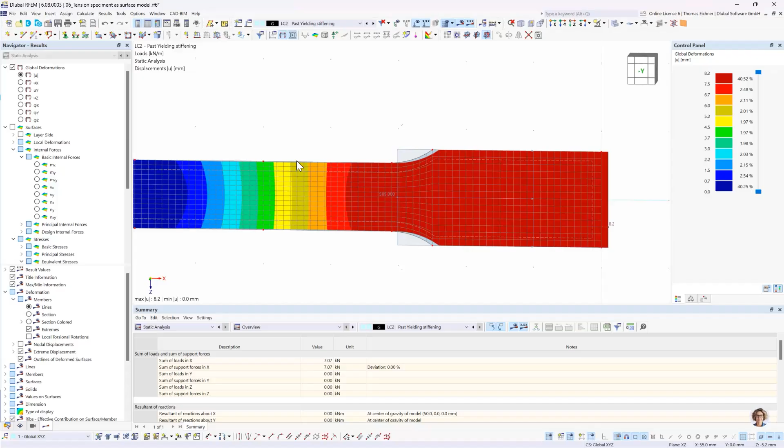And also what we see within that deformation, let's look at it in our animation. It will also shorten, you see it right here. So in the cross-section plane, it will shorten, and that's with the Poisson's ratio, which we had in the first part of the webinar. Okay, but that's quite different, right? So as soon as we have a trespassing of that yielding limit, we shouldn't go for the elastic material anymore, or we should increase its limit at least, or change a different material, let's say it that way.

Also, now we're interested, okay, which elements are yielding in this case? That's something we can also investigate with RFEM. We could go for our criteria here, and there we can go for our plastic criteria. So right now we see everything as estimated within this region in the middle is already in the plastic region, so in the second part of this bilinear material definition.

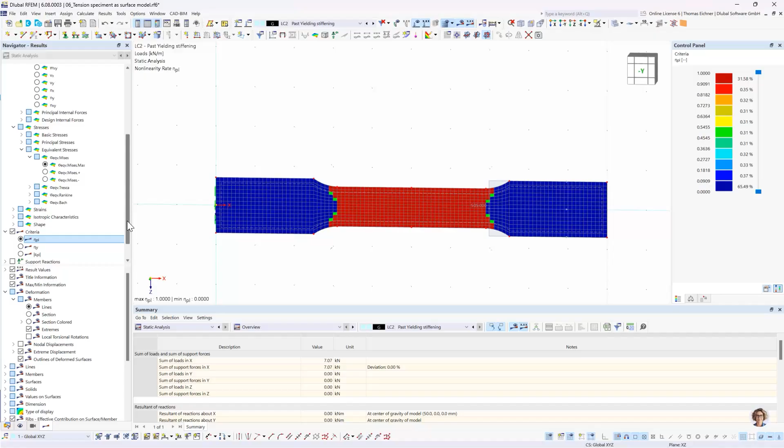Also, for sure, we can watch at our equivalent von Mises stresses, and there we will also see this 24% here on top. They lie between our yielding limit and a higher value. The higher value is not that much higher, right?

This is due to our post-yielding stiffness, which is just 2.1. That means we won't have just one line here which takes every force now, which could be possible with an elastic material model, but with this very small elasticity modulus, everything here needs to take its part for taking the load.

Okay, alright. So this is everything for non-linearities. And now we can get to our last part of the day, and this will be our singularities.

So let's go into PowerPoint again. Singularities, well, what are these and where do they occur? First, they occur at points of discontinuity in the calculation model. The problem is they deliver no meaningful results.

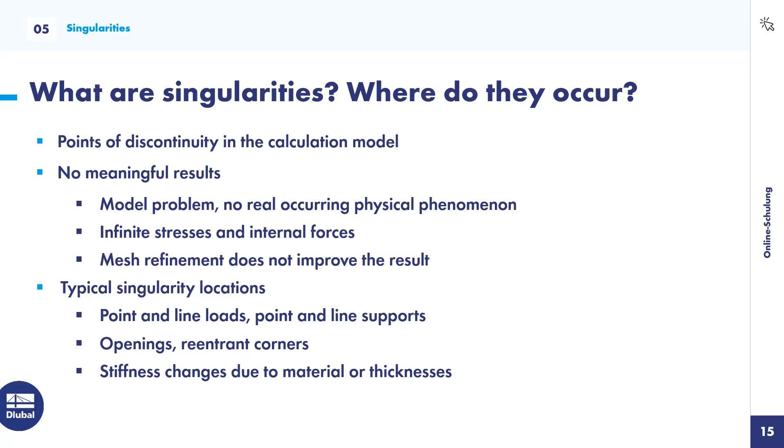So all of these points I can explain to you further in the next model, and if you would like, you could again start out from 6 and try to model along. It's gonna be, from the modeling, almost the same as our first model, so we can go through this a little bit faster.

For it, we're just gonna create a new model. We're gonna go for 2D XY plane, and we again don't use the combination wizard and the load wizard. The name would be something like, let's say, 7th example, call it singularity of a single load. Okay, and that's it.

Now that we have our model right here, we can go into our Z direction view and just create our stuff as we did previously. Let's create our surface again. Okay, I don't have our material here, so I will just search our C30 again.

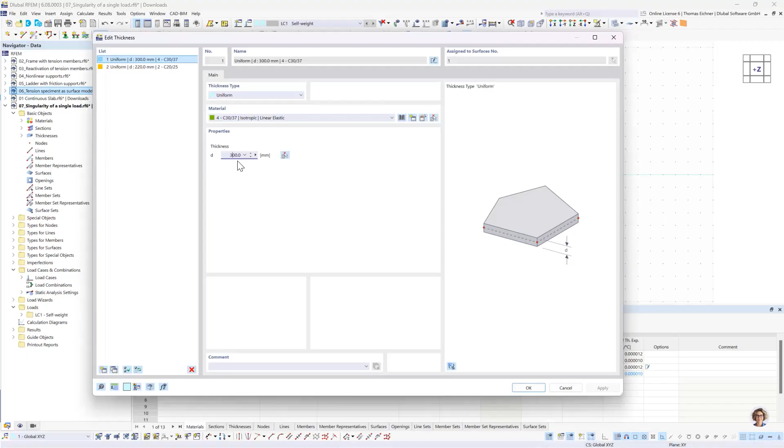If you're modeling with me, you should have now this material already saved from our first model. I just opened our tension specimen in between, that's where I got those materials imported from. Okay, we're gonna go with this concrete, and we're gonna make this 200 millimeters in this case. We're gonna press OK, and then we're gonna make this slab just 8 times 6 meters.

Now we want to investigate a point load. That means we're gonna just place it in the middle. We're gonna place a node in the middle of our slab, and on that node we will apply a 100 kilonewton nodal force.

So we have our stiffness matrix defined, we have our load vector defined. No, I think I deleted the load, that's not good. There it is again. Now we need some boundary conditions. Let's put in just some predefined line supports on every line in the system.

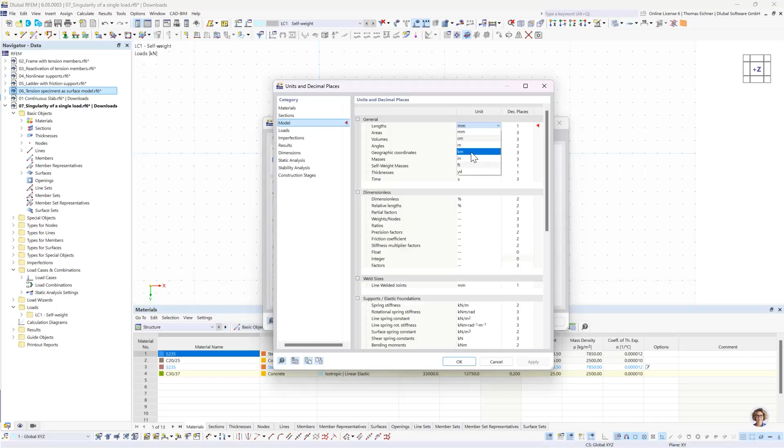And well, that's it already. We're gonna do the same as in the first model today, we're gonna copy it about 3 times, and with a displacement - oh, here comes the millimeter again, let's change it to meters again. And since they are this time 8 meters, we're gonna displace them by 10 meters, 3 times. That's good, there we have it.

Well, this grid, we don't need to see it right now, we don't have any use for it, so we're gonna just deactivate it here on the bottom.

So the next step would be the surface refinements, and that's something we also learned some speed with already. Let's go for 2 meters for surface 1, the next one will be 1 meter for surface 2, the next one with 0.5 meters for surface 3, and the next one - okay, let's not go too small, let's go for 0.25 meters for surface 4.

Okay, we see the rectangles again, and we also want our result section, meaning we're gonna go for special objects and then this result section. Just define the two end nodes for the result section, here and here. Okay, there it is, and then we're good to go. We just need to deactivate our self-weight again, and then I'm just gonna start the calculation right here.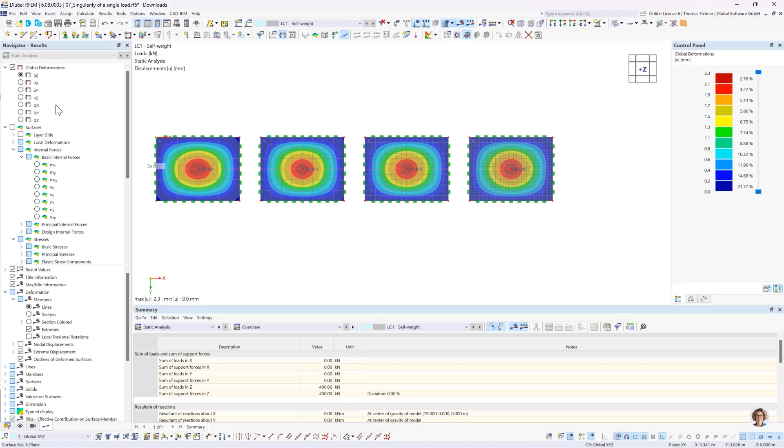Okay, there we have it. Let's look at our deformation in the y direction again. Let's show our local extremes. There we see the deformations seem quite good, around 2.3 everywhere, so we can't see the singularity, at least for deformations.

But let's see what happens if we look at our bending moment. Let's activate the my, and now the singularity takes place. For the left side we have here 37.17 kilonewton meter per meter, compared to the right side we have 52.

So I think an estimation of 20 to 30% more, that's quite a lot. Well, 50% off this one, but yeah.

And for the design, what value would we use now to calculate the needed reinforcement in this case? Would we go for this 52, or would we go for this 37? What's right here? That's a well often occurring problem in practice, because we need a design, right? So we need an approach to design these differences, and there we have some approaches for.

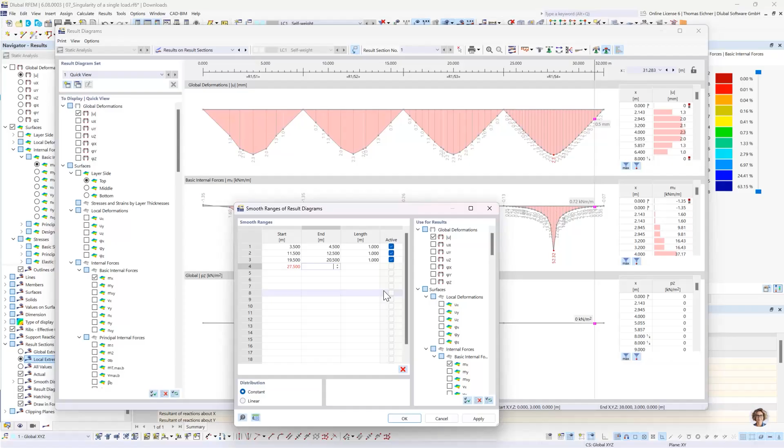So the last one with 27.5 and 28.5. You can press apply. So it's okay, there we see now here we have 31 as the integrated value. And yeah, now we don't have like a 30% or 50% difference anymore. Quite the opposite, we can see here 31, 31, 31, and here 28.

So it seems like for this design it would be most economical to use this value here, and also myself, I would just design now with this smoothed value. But also if you have not just a coarse mesh, the difference is not too big, so you could also design just for this 31. But as you can see, it's sometimes important to do some investigations on the size of your finite elements.

Okay, let's quit it here and go into another approach for counteracting those singularities. One other option would be that we don't apply these nodal forces.

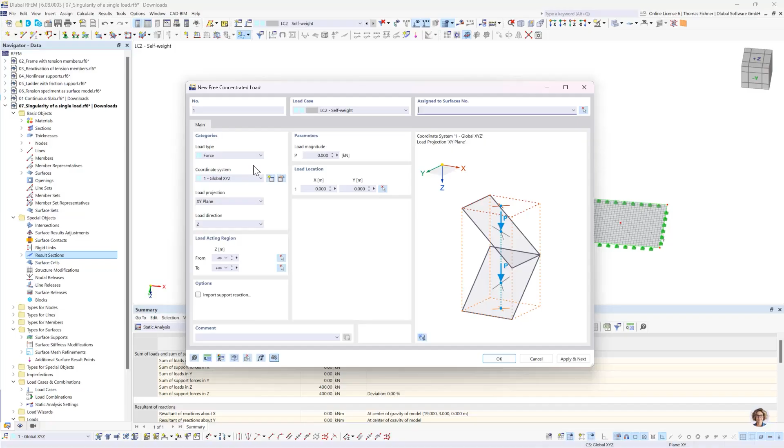Let me just copy this load case. And in the next step, we will assume there's a column on top with dimension 0.5 meters times 0.5 meters. And that means we want to have a loading which is also like this, which is an area load and not a concentrated load anymore.

So let's go for this new free rectangular load. This function right here is exactly what we want. We want to have column dimensions of 0.5 meter, and we want to have a center point right here. Then we also need to assign it to a surface right here, so surface 1 with the center this and the column dimensions of this.

Now we can apply. Oh, I forgot the load value. The load value would be, let's go for a formula here. This is now, let's see, 100 kilonewton, that's what we had as a point force, divided by 0.5 meters times 0.5 meters for the area of this new column. It's done, and we have a result of 400 kilonewton per square meter.

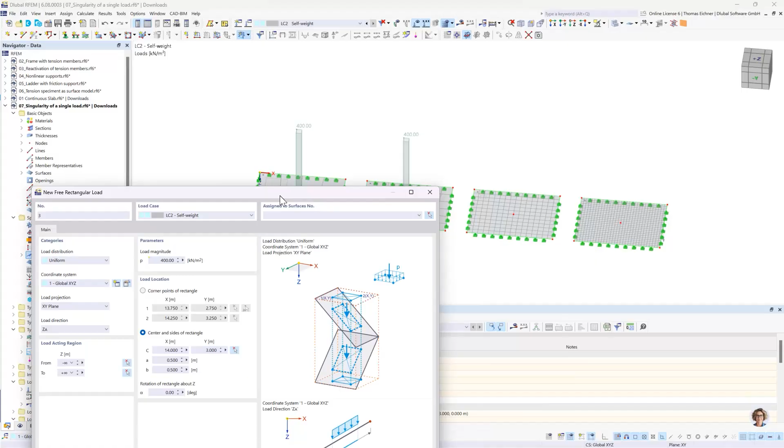We can apply it, and there it is. Now we're going to repeat it also for the other surfaces, and therefore we only select the node and the surface, and apply next. There it is. And this same procedure we're going to repeat two more times.

This is okay. Surface 4, well, we need this node here in the middle. And there it is. So let's calculate already and let's see what our results do.

Let's go in the y direction. And what a surprise, it helps us. It helps us extremely, and it also correlates with our smoothing range, right? This one is a bit smaller than the rest now. We have 30. I think with the smoothing range, we had round about 31, maybe here 28. And yes, that's quite cool.

One other thing, of course, you could also combine those two variants. So we could use this result now and also smooth it over a certain range. So that's one possibility or two possibilities to counteract singularities.

Okay, and now we're gonna treat our last investigation for today. Therefore, we will need a new model. And we're gonna pick this time 8, and there we're gonna go for nodal support singularity.

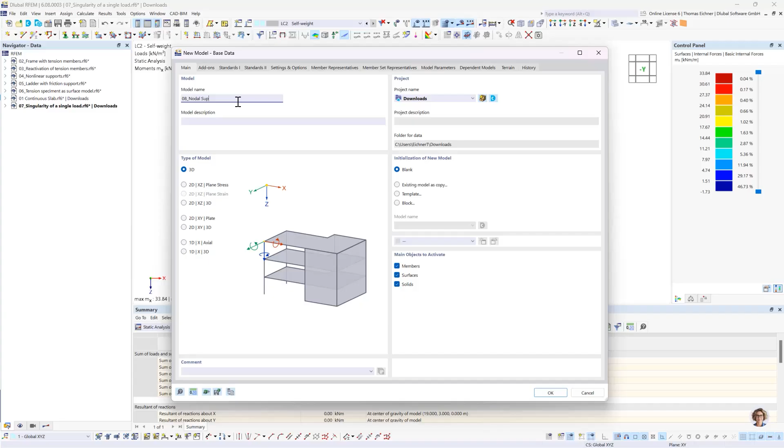Again, we're gonna go for 4 slabs here. Let's just start right away. This time it's quite easy. The only thing I wanna change is here. I wanna go for 300 millimeters again. And stay with these C30, 37. Press OK.

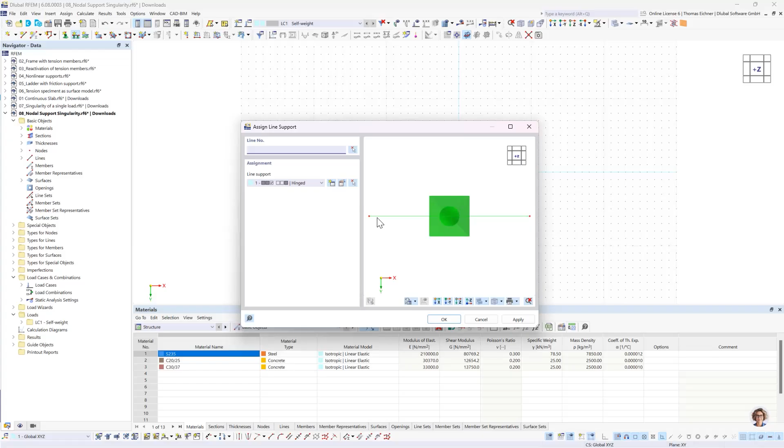And then we can create our system with, let's say, 8 times 4 meters. And we will want a nodal support right on the left-hand side, so at 2 meters and 2 meters. We will want to have a line support on one side of the surface right here, and we want to have a nodal support just in Z direction right here in the middle. Okay, we can also adjust the size here a bit.

Okay, next step, just as before, we're going to load it with 10 kilonewton per square meter. And we're going to copy all of it in the same way, 3 times in 10 meters. Okay, there it is. Then we're going to add our surface refinements.

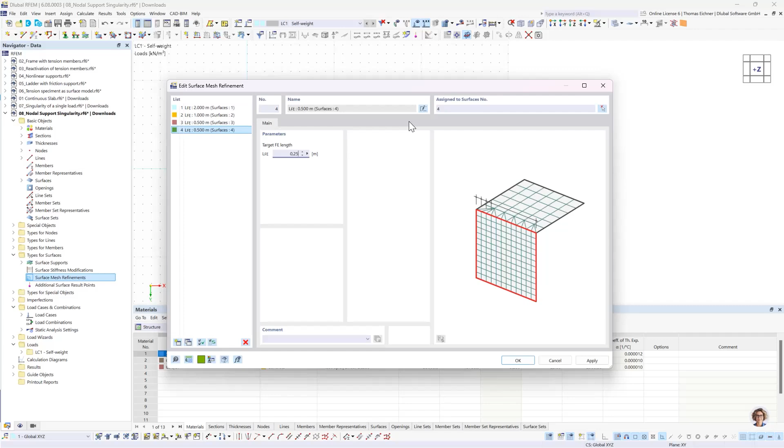Mesh refinements, same way as before, 2 meters for the first one, 1 meter for the second one. Oh, now I was kind of too fast because I did it for 2 surfaces here. Okay, 1 meter for the second surface. Copy. 0.5 for the third surface. And for the fourth surface, we will go with 0.25. Okay, that's what we have here.

The last thing missing is our special object, which is our result section, defined by 2 points. Okay, so it's done already. Let's go and deactivate the self-weight again and calculate it already.

Okay, let's go in the Y direction again. Maybe this time we can go with the view cube. There it is. Let's also have our all values here. There we see, now we see the problem with this mesh here. Well, an exemplary problem. We see on the finer mesh, we see our maximum of 1.7 millimeters, kind of right there.

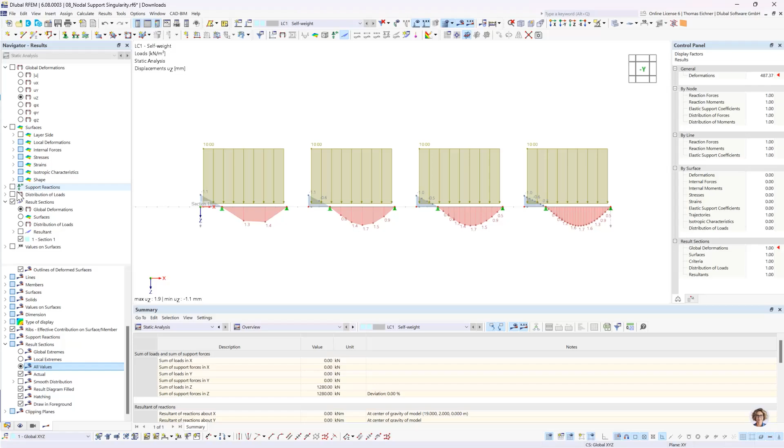But let's see at the other point, and that means let's see at our result sections, which should be the same results as our surfaces. And there we want to have our mx again. And what's happening here? We have 46. We even have a jump here. That's not really right. That's due to there's only one element here. So here the results are obviously wrong.

And in the other ones we see it quite better. But the problem is above the nodal support, let's deactivate the loads, we have again a value that gets higher and higher the finer the mesh is. So for those singularities, we would have the same options as before. We could use the integrated values, like the result smoothing, or we can also go and edit our support.

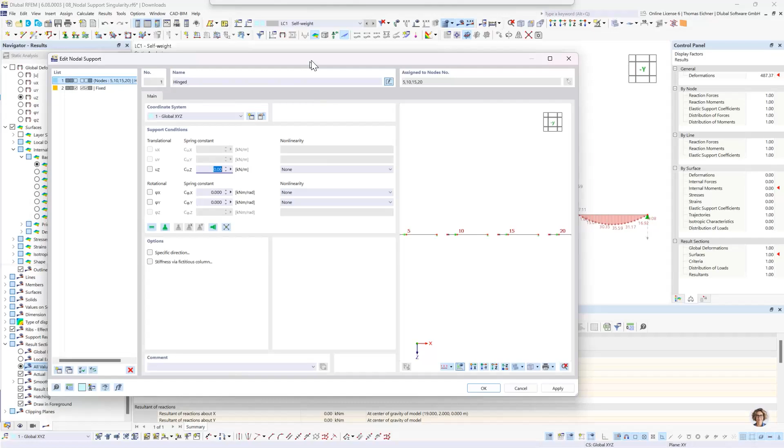This is quite similar to the case where we just transferred the nodal load to our surface load. But right here we can go into our nodal support, and we could either just add a spring constant. This would make the support flexible and it would be able to deform vertically. The problem is there it wouldn't help with the singularity, since this is not really a statically overdetermined system.

I mean, it's a plate and it has one support on the right side and one support on the left side. So it's all, we could call it statically determined. And with that said, if we add here some deformation capacity of the support, it would be able to deform like in that direction. But it would have to take the force anyway, because the force can't go anywhere else. That's only possible with statically overdetermined systems. That's the reason why it wouldn't help in this case.

But what would help, what can help, is that we add an imaginary column, a fictitious column. And this column can be defined in the step.

We will go for a column of 3 meters and also see the values change at each input. We will go for material C30, with a hinged column base. What the program does now is calculate equivalent springs right below the support, which are calculated from the geometric boundaries of the column below. We can also define if it should be this surface-like support, or just one elastic nodal support, which won't get us too far ahead right now. So we will go with this elastic surface foundation.

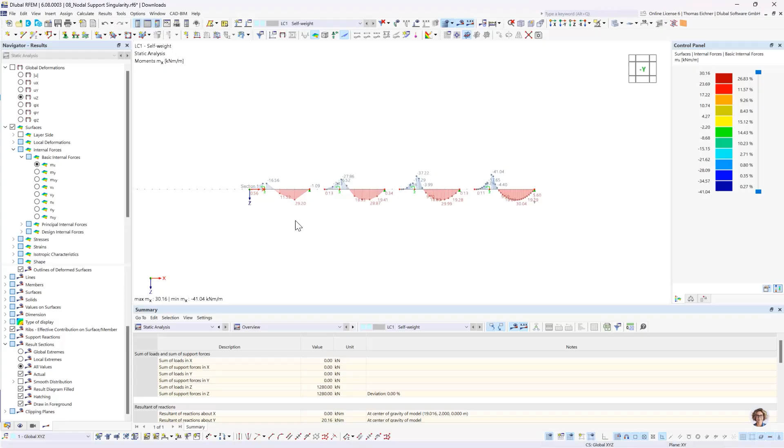So, now what can we see here? It's quite better than before, because we had around 90 here. We don't have results now for this elastic support, since it just goes into the support already. But at least look at the difference here, a difference of 4.

I would compare those two, those are fine. This one, maybe the system is still too coarse, I would say. And this one, we can forget anyway. So this helps a bit, right?

Maybe another results smoothing would also help. I think the results smoothing, in my opinion, had the best impact on our singularities for the day.

Maybe one last hint about singularities. The problem with singularities is due to the finite element size. Let's think about this.

For example, this nodal support here, we see this white rectangle, and we have a force here. If it's a nodal force or a nodal support, that doesn't matter. In the end, for the system, it's just a point force. So the problem is the point force must develop over the space.

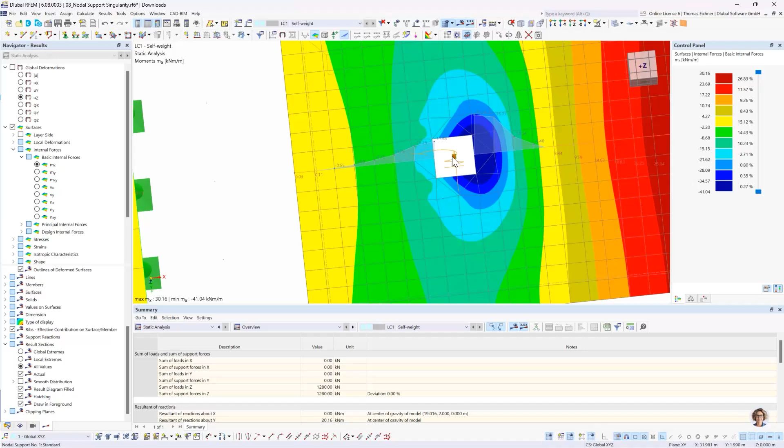And it's mathematically correct, but physically it's just not going to happen, because we never have one pointy needle in those systems. And if we did, the needle would just punch through this slab.

And that's it for today. Let's maybe just revise what we did. We looked into the finite element analysis and its principles, how the procedure is within programs as well as in general for finite element analysis.

We looked at it in RFEM 6, and we looked at the impact of finite element lengths on the results. Then we investigated the plate theories, the difference between the Kirchhoff and the Reissner-Mindlin theory. We said the Reissner-Mindlin theory is the standard, it's the better approach, and it's used in the programs by default.

We also talked about nonlinear calculation, whether it's geometric nonlinearity or material nonlinearity, and investigated several examples for it. In the last part, we looked at some singularities and how we can counteract those.